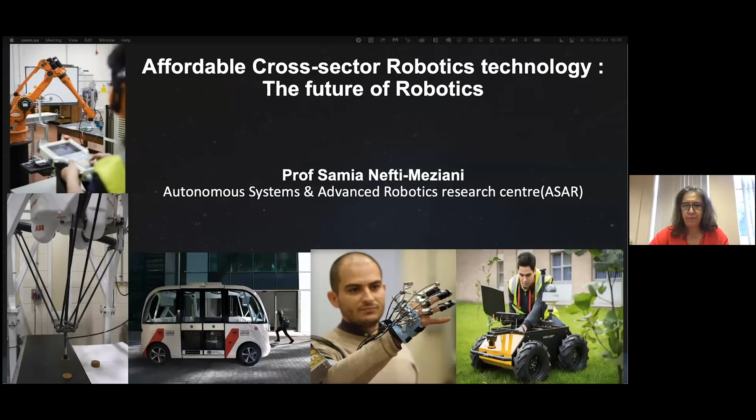Excellent, okay, thank you, I think I've got the slides sorted now. Good afternoon everyone, thank you for the invitation. It's a pleasure to be here to talk about affordable technology for cross-sector industry, and also how I see, from my perspective as an academic and entrepreneur, where robotics is really going in the future.

Before I start my presentation, I'm professor at Salford, and I'm also leading the development of the newly established North of England Robotics Innovation Centre, co-funded by the EU and UK Research England. The idea is to build cross-sector technologies in robotics—this is the first in the UK. I'm also co-director of the EPSRC hub in robotics and AI for future space technologies, and founder of the National Robotics Network, set up in 2013 alongside Salford and NDA.

I wanted to start by showing these slides because it's really important to see why I think the future will be cross-sectorial technology. As you can see from these four photographs, coming from different sectors—the focus of my center for the last 25 years has mainly been to design affordable smart system machines which can interact and collaborate safely with humans, at different levels of autonomy.

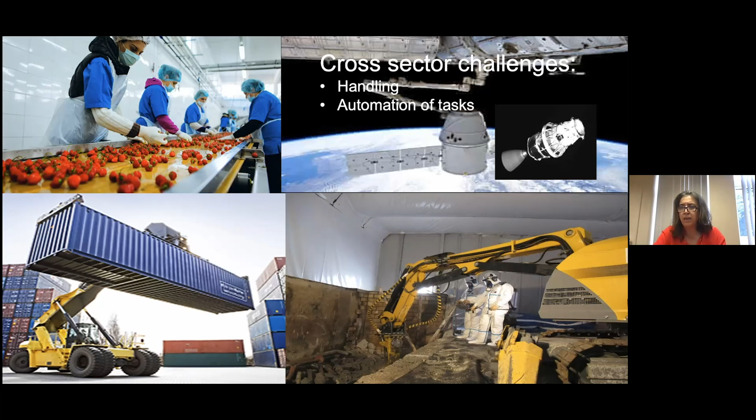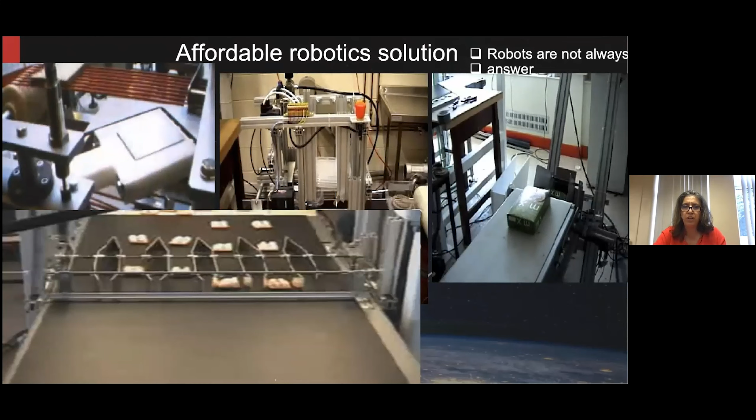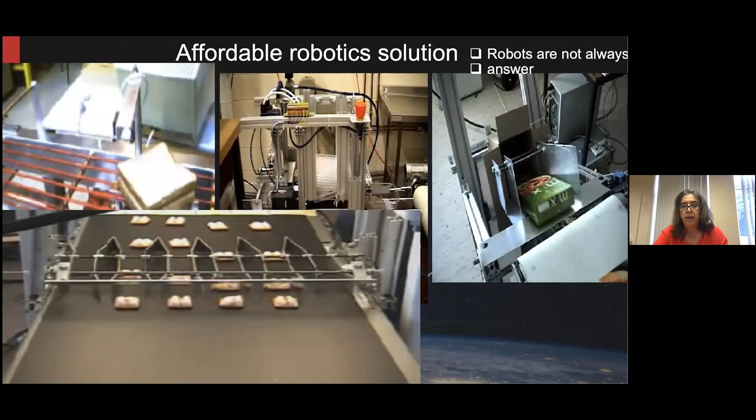Now, I'm just giving an example of the different automation system machinery that we have developed over the years. The reason I chose these examples is because it shows how simple they could be, but yet it's hard to think about the solution. The reason I'm doing that is most of the cost is usually the biggest problem.

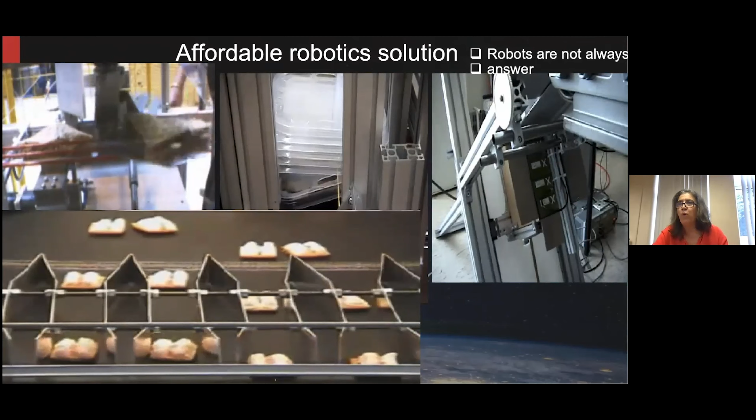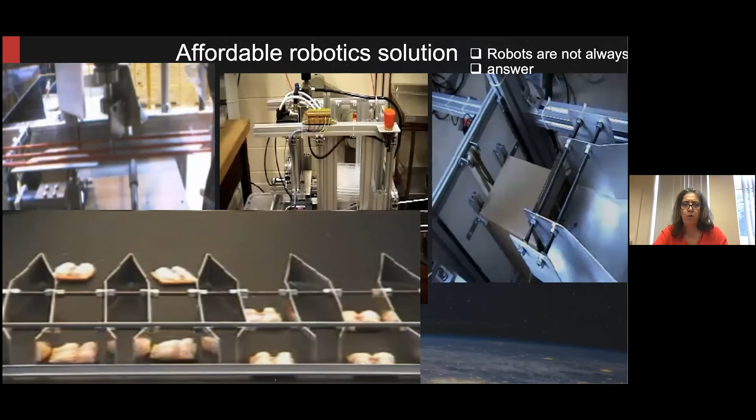And us as academics, we have to factor this as a key problem. It's good to design sophisticated technologies with very expensive tools, but it's very hard to design reliable technologies in a very low cost way. And I think that's really important.

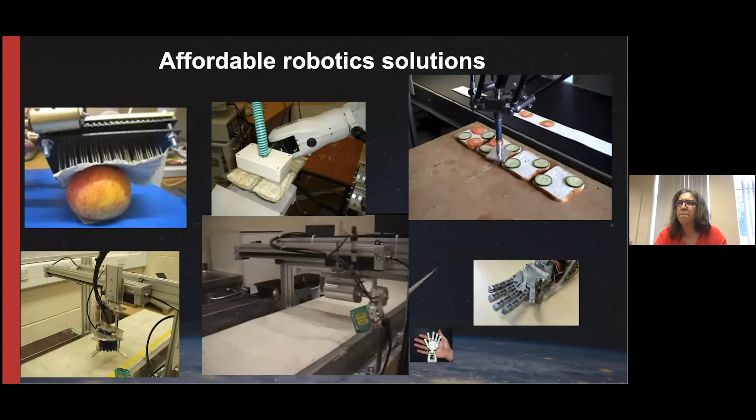Then you could see we have developed several machinery, and as far as handling systems, we have designed different end effectors. Another affordable automation solution we have developed is for food product, which can vary enormously, but you have to have dedicated grippers for different types of products. This is not the solution, or at least represents a very challenging problem for us as academics.

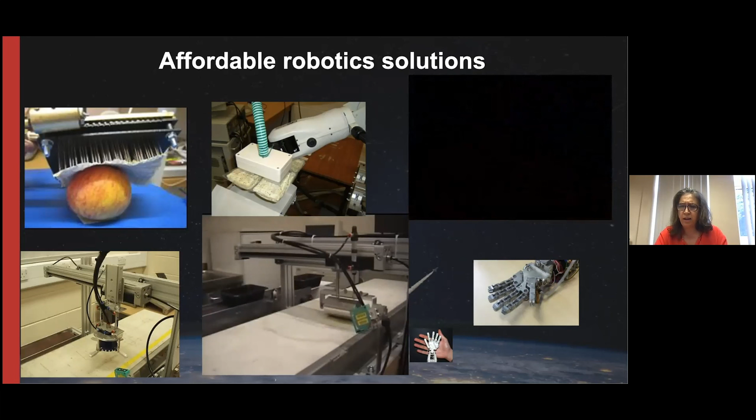Something my team has been really looking at for the last decade - I coordinated a big program, the first in manufacturing, involving the design of end effectors. There are special end effectors, there are cross-sectoral end effectors, and this is quite a complicated problem to address.

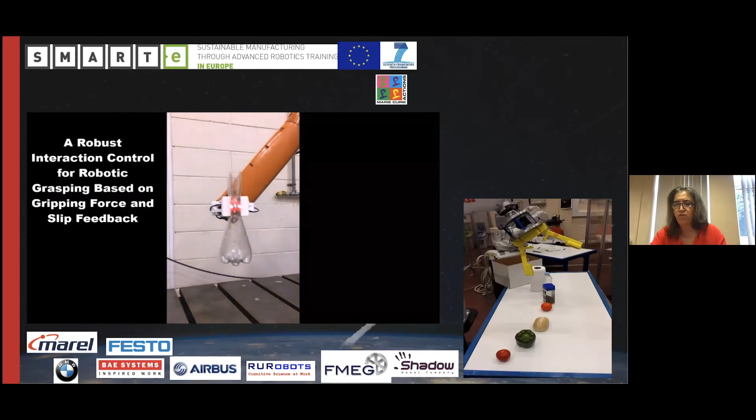I'm showing here a gripper which can be used without the need of a vision system. What it's all about, when you look at the company's art, is all about productivity. Ideally, we want to use the same gripper for every single task across different sectors without having to change it all the time, because that's not interested in terms of productivity. But we also have to think about the design, because cost is of paramount importance.

Having a gripper which can blindly grasp without letting an object slip, regardless of shape, form, or payload, is absolutely a winner for industry.

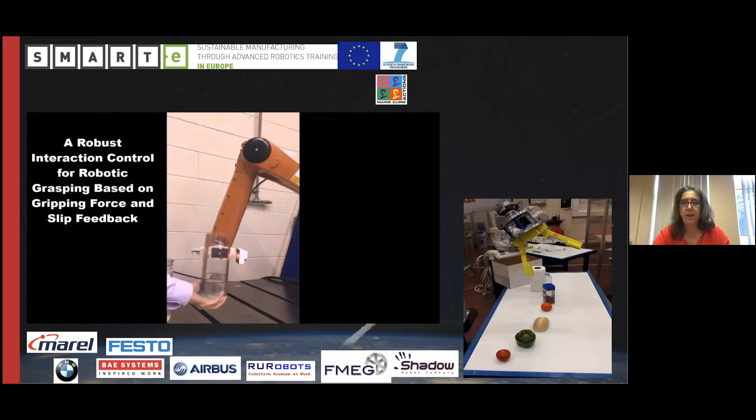This is one example, the first prototype. I'm pleased to say this prototype led to a 45 kilogram version of this gripper, which was part of the 8.5 million integrated innovation nuclear decommissioning competition led by Jacobs and funded by NDA, Innovate UK and BEIS.

This was part of the technology selected to pass to the third stage. I'm very pleased that this gripper, the same one you've seen earlier, will be tested at the Sellafield site by 2022.

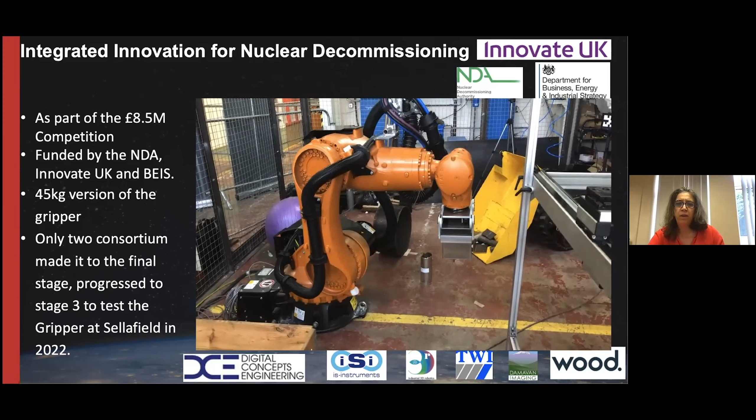You can see this gripper can handle all types of objects, including the ball you can see at the back, which was a key problem especially when placed in a nuclear site. It's important that you don't have to worry about changing the gripper for any object - that's exactly the technology they wanted to have.

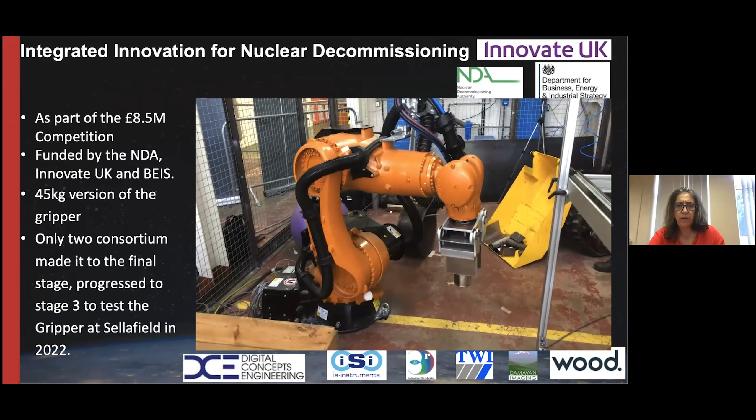I'll skip these, I'm afraid. The same version of the same gripper is being deployed now as part of a demonstration, showing a simulated test bed of a satellite equipped with a robotics arm, as you can see, in our FAIR-SPACE hub.

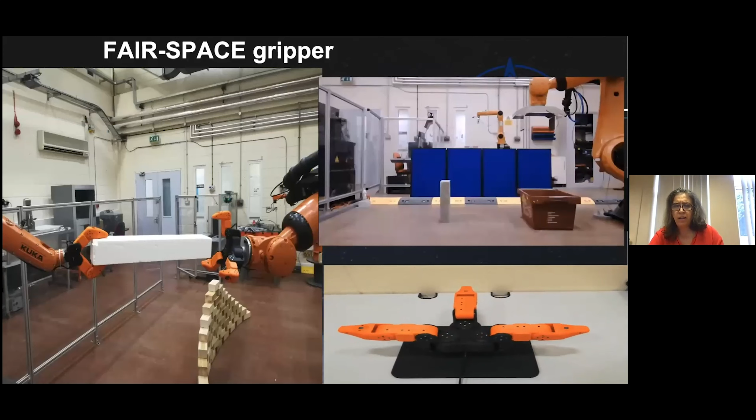This gripper technology can autonomously and surely grasp a nozzle of this AKM apogee to pull toward the satellite body without the need for an RGB camera. That's really important - you have a two-fingered and a three-fingered version.

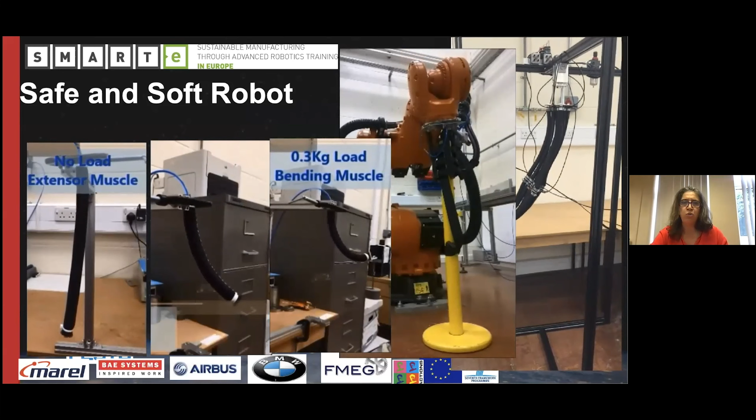Another important area - we talked about soft robotics earlier, it's a key area, and the problem is it faces a lot of challenges which need to be addressed. Why is it important? Because now we want to move from really hard rigid robotics systems to soft, safe systems ideally. But there are a lot of challenges that need to be addressed.

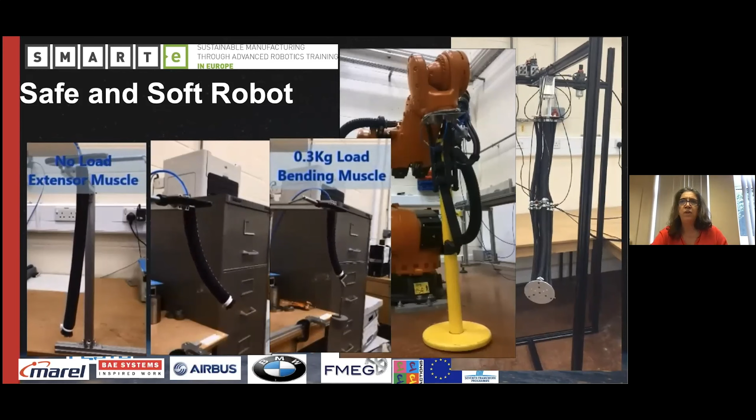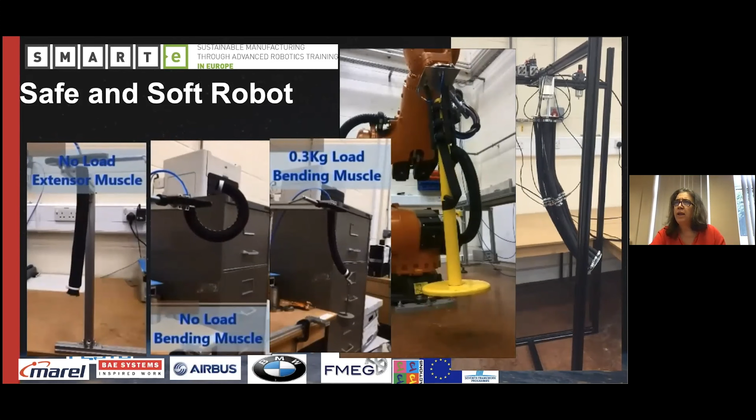I think we've been really active in designing systems at the component level - you need to sort out actuators before thinking about robots, and that's what we've been doing. As part of that, a different technology emerged, because we are in discussion about using soft robotics in manufacturing for maintenance and assembly. We have also started discussions to take this further with hospitals.

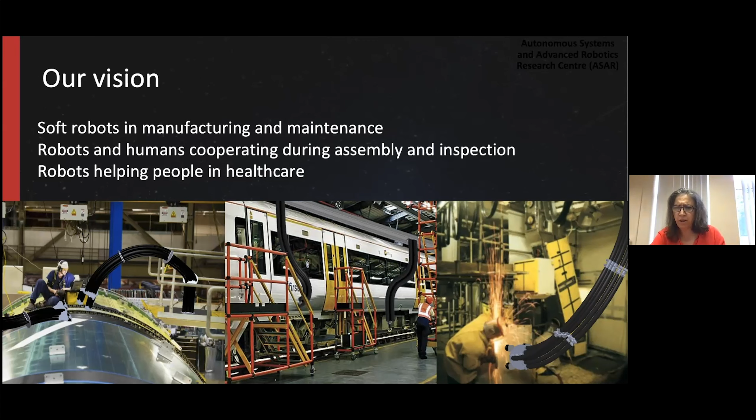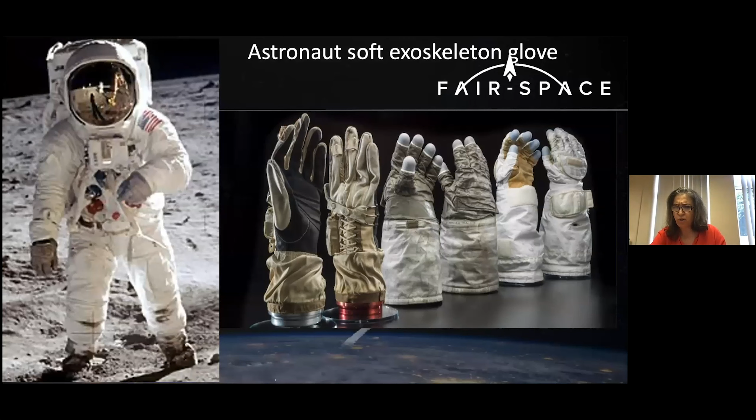Then we have another here, as you could see, the same technology which comes from soft robotics. We are deploying it for another application: soft actuator sensors for astronauts.

I would skip these because I'm cautious about the time. We have developed a prototype here for an astronaut glove. It's a wearable force augmentation glove using pneumatic muscles, which will assist grasping and manipulation of objects held by the astronaut's hand. The accuracy of these actuators will highly depend on the sensing technology we have developed.

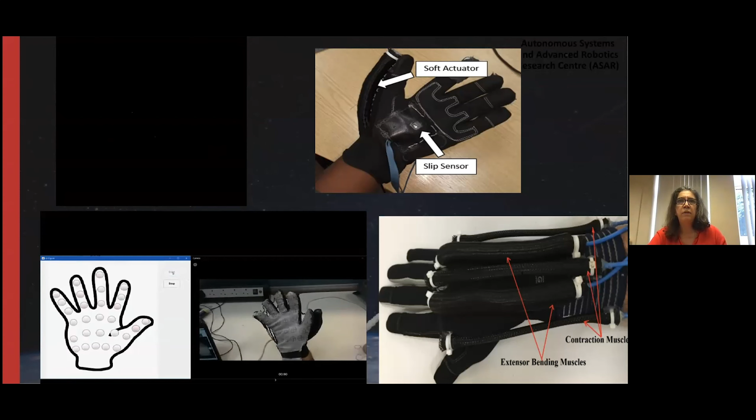A new type of sensing technology for this glove. I will skip the slide. Now, another technology, which is a cognitive platform for intelligent perception.

This was part of the Gamma program. This platform is endowed with high cognitive capability. It has been used in different sectors, particularly aerospace, and after in defense with MOD.

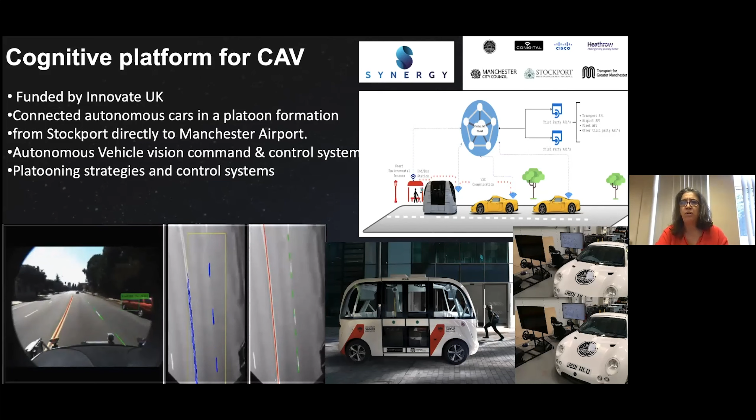Now what we have been using is part of Innovate UK. The same technology is deployed to build the CAV. My group is building the CAV, this cognitive platform, which connects the Westfield autonomous sports cars in platooning formation from Stockport to Manchester Airport. The trials will be in August. It's a real system now, being deployed in a real application.

Without losing sight of the digital twin, it's a very important part. You've heard about how important digital twin is with robotics, with cyber physical systems, that RGP has been working on — the framework they have developed. Why it's important: we used to call it simulation in the past, but it's more than that now. We are looking at a framework which reconciles the cyber physical world with a robotics platform.

I wanted to talk about how important cross-sector technology is. The NRN has been doing a lot of work on this, and I'm pleased to say they have issued the first roadmap in this area. We have been working on establishing the common need, establishing the technology baseline with end users, and also the technology development, and the key areas of technology we need to focus on.

One of the things I'd like to say is we have to think about cross-sector robotics. Traditionally we've focused on robustness, but I think we need to completely rethink the way we design robotic systems. We need to think about reconfigurability — how important it is to design a system that can continue functioning in the presence of internal and external challenges without fundamental change of the original system. Those are the key challenges we have to develop.

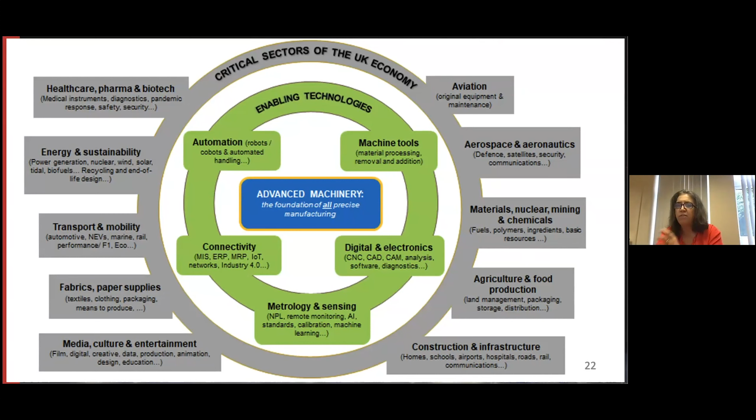I'm also pleased to let you know that the UK is investing in smart automation, smart machines, because it's absolutely vital for industry. We are part of this AMP initiative, which is about establishing and delivering capability and activity on behalf of the advanced machinery sector — and by machinery sector I mean the entire supply chain. When we think about robots, we shouldn't think only about the robot itself, but the different components, which is absolutely vital for the UK economy.

This follows on from that. We just heard last week that we won the AMP initiative, Strength in Places, with the University of Leeds partnering as well. AMP stands for Advanced Machinery Productivity, and we will be, for the first time, looking at how to really develop smart machines. This is extremely good news for the UK. Those are the partners and industries behind this initiative.

To finish off — and I'm sure Anna will talk more about this — I'd like to conclude by saying I'm very pleased to show that the direction of research my team has been taking for many years and decades, and the National Robotics Network, is now aligned with the RGP aspiration of building this cyber physical fabric: creating, and more importantly reconciling, the virtual world with the physical smart machine world.

These have to basically — we talk about the need of common interfaces, common standards, but also the digital glue, which is really important. You can't do that if we don't start really thinking from now how to build this next generation of common technology or cross-sector technology. Only by doing that could we have this coalition of end users who want to work together to build and invest in this technology. Thank you for your attention, and that concludes my talk. Thank you.

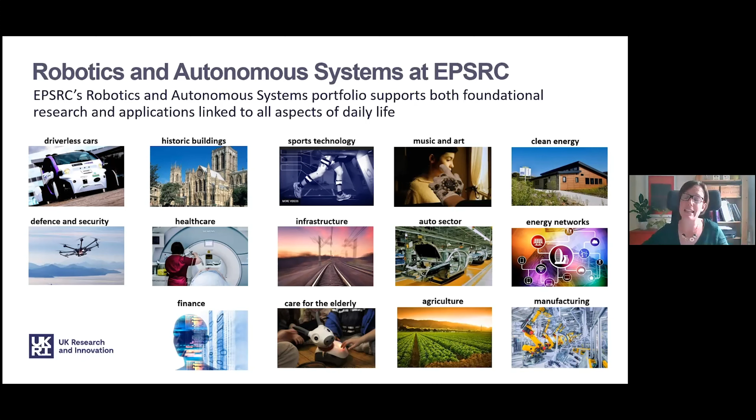Because in the end, a lot of people I talk to who aren't you people on the call today tend to assume — and I'm sure you come across this all the time — that the robots in films are real, that it's all done, you can buy it in a shop. But actually a lot of what I try to do, as I think you probably do too, is talk about the key foundational research we need in order to drive that vision forwards.

At the moment, the interesting thing to me is the richness and diversity of the portfolio we currently have in terms of robotics and autonomous systems. We support research activities through lots of our bottom-up routes. We have a rich and diverse responsive mode portfolio across the organisation, across EPSRC, that relates to robotics and autonomous systems — whether it's some of the application work Samia talked about, or some of the much more foundational computing or control systems work at the other end of the spectrum. The really interesting thing is we have that basic portfolio.

We also have, I think, a really strong portfolio of programme grants. Those are large critical mass investments. Many of you will know about these, or some of you on the call lead them, sitting across the UK and focusing on key topics. I think it's notable that there are so many of these big strategic investments, because that reflects how important and valuable the broader research community sees this area through peer review.

Also in our portfolio, I think the role of skills investments, the CDTs, which many of you are very aware of, are a key element of what's being driven forward in robotics and autonomous systems, both in terms of research and the broader workforce, which touches into the white paper that Rob talked about earlier.

The two investments I wanted to briefly touch on, other than the very important UK-RAS network - sorry for forgetting that plug - are the ISCF investment, which many of you know is 4 hubs in extreme environments, one of which Samia already talked about. The other is the Trustworthy Autonomous Systems Programme, a hub and nodes activity involving about 18 institutions and 100 project partners.

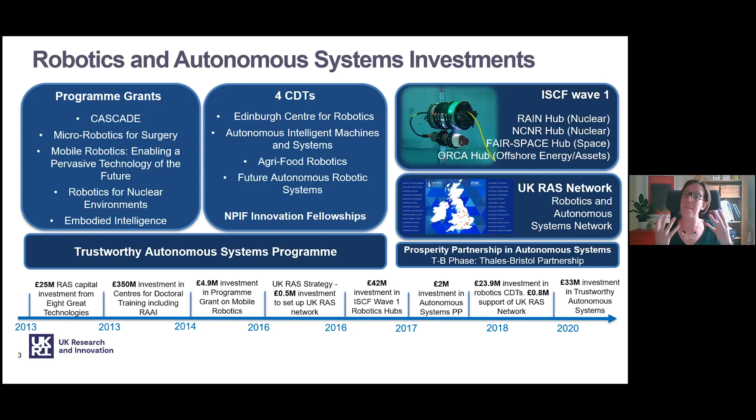So my role has changed over the decade I've worked at EPSRC, from thinking about these kinds of conversations and how we invest, to also having to write the really big grant proposal to get the money for you to write your grant proposals. There's something interesting about the fact that we've been quite successful in making those arguments, because that means others buy into the importance of this area.

So I think the aim of my team - apologies for the excessively animated slide at this point - is really thinking about that opportunity.

There's quite a high political profile of both robotics and autonomous systems and AI, and the continuum between those things. Don't get me wrong, it's a complex landscape and I could draw many Venn diagrams, but there is a high political profile of them.

The interesting thing my team tries to do - we were only set up a couple of years ago essentially to do this - is take that political profile and use it as an opportunity for the research innovation community. What I mean is really thinking about how we take that profile and advocate for the need for research and innovation investment, in order to deliver on the exciting promise that politician or industry colleagues might see in robotics and autonomous systems.

We really do that by trying to understand the landscape - you'll have met lots of my colleagues. We try to understand the gaps, the opportunities, the barriers, and what we might need to do to overcome those, working in partnership with you.

But we also spend a lot of time building and consolidating mutually beneficial relationships. I know that sounds like one of those slightly naff terms, but I think that's the core part of what we do - working with UK-RAS, with the RGP, with yourselves on this call, with lots of stakeholder groups, with government, to think about how we advocate for the importance of RAS, and how we really realise the opportunity of the high political profile by collaborating together.

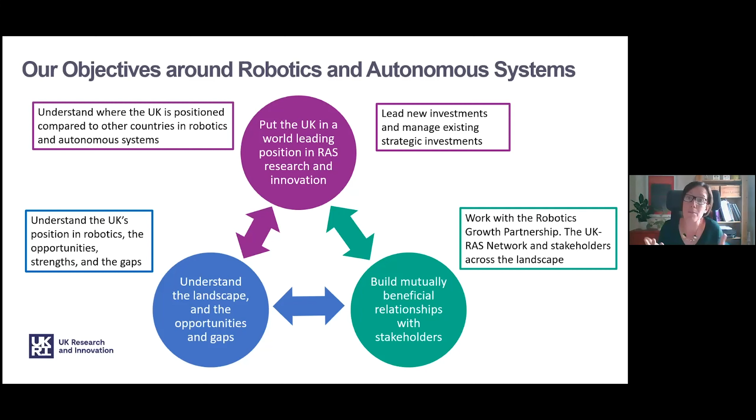So that's where the challenge bit starts to come in, rather than simply the 'where are we now' bit, which is my first couple of slides. Because in order to really maximise that political profile and turn it into an opportunity for all of us, that has a role for probably everybody on this call and lots of people that we all know.

So just to move on to a forward look - I'm going to say something which might make you all roll your eyes, I say lots of those kinds of things, I'm aware of this, don't worry - but I would really encourage you to have a look at some of the current government strategic pieces around research and innovation.

So firstly, the government's recently published innovation strategy brings out robotics and smart machines as one of its 7 key technology families. That says there are colleagues in government who've been influenced by the RGP, Samia and colleagues, and Rob and others, to really prioritise the importance of robotics and autonomous systems. There's also things like the integrated review, essentially a review of defence research and innovation across UK government, which brings a lot of really interesting questions about autonomy, control systems, decision-making systems, and the need to build sovereign capabilities in the UK.

And whilst you might think, well Anna, this isn't really relevant to my research, I think it is, because that is what the shape of this opportunity looks like. It's that profile that robotics and autonomous systems has at the moment in a political context that together, I think we could do something to really build upon.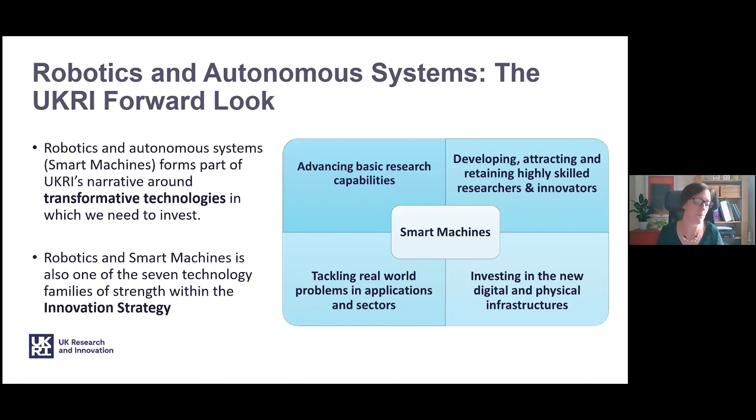So just to leave you with maybe a question - a rhetorical one - how can we work together? My team and I do a lot of work to advocate for the importance of this area, and lots of colleagues on this call do that advocacy piece too, but I'd really encourage you to think about how we do some of that together.

How can we continue to make the case for all the routes we can think of for the importance of RAS research, and the fact that we're really good at it in the UK, and that those robots in films aren't things you can buy in a shop. I know it sounds flippant, I apologise, but we need to remember that's where some people are as key stakeholders in this space.

And for me there are 2 parts to that. One is about that advocacy routes piece and what we can all do. The other is about evidence - how we evidence the benefit of investment, what's come out of things in the past. I know it can be annoying when we ask about comms stories - I'm not even going to mention REF, I know I just did, but there's a really important thing that comes from stories about impact: it tells a really compelling piece to people one needs to convince about investing in these areas over lots of other very important areas that equally exist in the landscape.

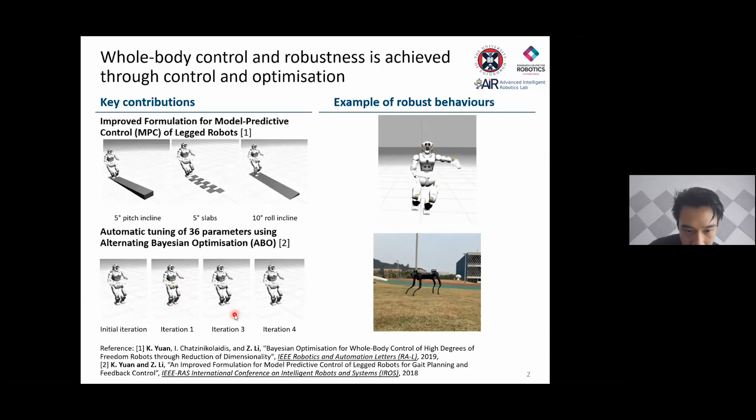So in the initial iteration, nothing is going on, and the robot falls over after one step. After one iteration, it's a bit better, but only after three you can see that it walks all the way to the end, though there's still some jittering. After four iterations it fully converges, and actually the parameter set is better than what I could tune by hand as a human.

Some of the robust behaviors you can also see include one-legged balance. This is, of course, in simulation, where we drop five-kilogram boxes on Valkyrie, and she's still able to balance.

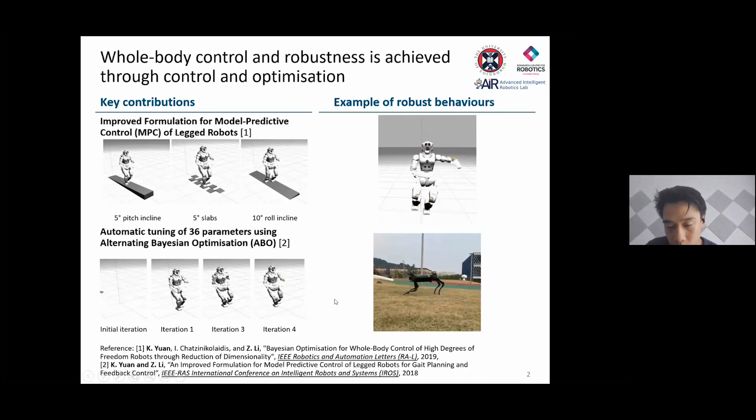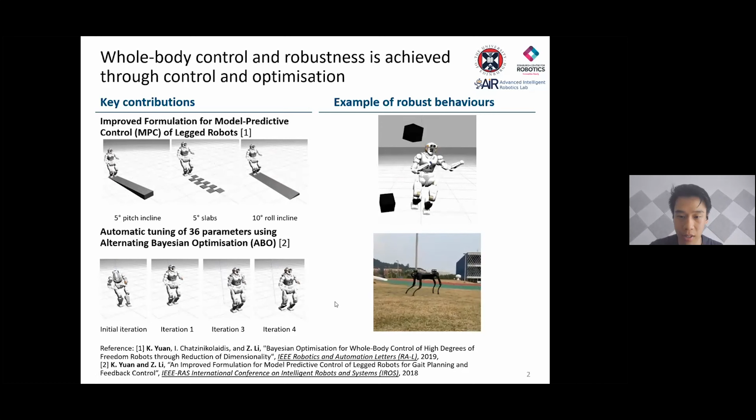What you can see here is basically Jueying, which is a quadruped robot, being pushed, and it recovers from a fall. Maybe that was a bit too quick, so I'll just play it again. The high-level control is provided by deep reinforcement learning, but the low-level control is done with very classical control.

Talking about deep reinforcement learning, which is the major part of my PhD, with its advent a whole new door opened: we can get intelligent motions by only specifying a high-level reward. The idea is that we tell the robot what to do, in this case walk forward with a certain velocity, and then just let the robot interact with the environment and learn how to actually achieve that reward.

So you can see here quadruped locomotion, quadruped fall recovery, which is from a fallen position just standing up. Here you can see how dual arm cooperation is done. With the left arm we are generating clearance, and with the right arm, once there's enough clearance, we are going to grasp it.

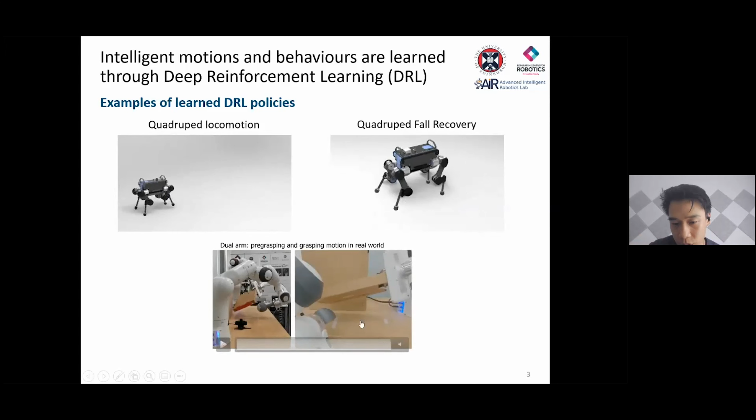What you can do with deep reinforcement learning is, of course, train a policy and then directly put it on the robot, as you've seen in the previous slide. But an alternative way, which we've proposed, is that you can also reverse engineer this AI policy into a controller that does exactly the same thing as the AI policy, but with the transparency and stability guarantees that you have from classical controllers.

We've demonstrated one way of doing so: we trained a deep reinforcement learning algorithm to make a humanoid recover from pushes. Valkyrie is pushed from the back or front, and she learns to balance basically the same way we humans would. For example, the step strategy - if I pushed you very hard from the back, you would take a step to counteract that disturbance.

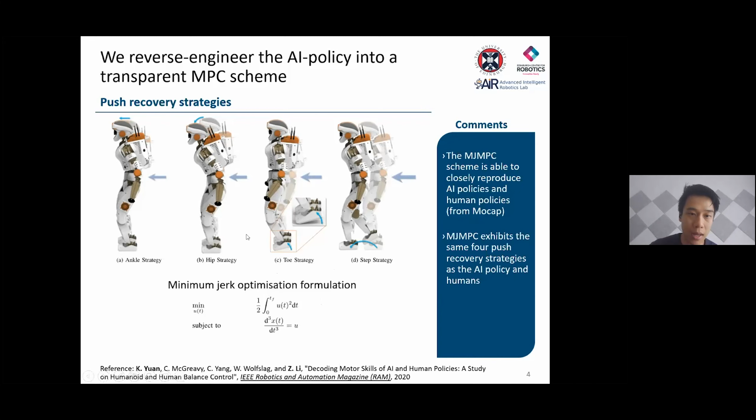It turns out that the deep reinforcement learning agent is learning a minimum jerk optimization formulation. So we formulate this as a minimum jerk problem and put it into a model predictive control scheme. In this paper we showed that this is exactly what both the AI policy and, surprisingly, also humans do.

We found this a very cool new way to use deep reinforcement learning policies and bypass the stability concern. Another thing you can do with reinforcement learning is combine multiple experts - what we call the multi-expert learning architecture. The idea is to use multiple experts whenever appropriate to generate new adaptive behaviors and achieve versatile skills.

What you can see here is that Jueying, this quadruped, has two experts: fall recovery and trotting. Using our multi-expert learning architecture, the robot learns new skills. You can see the skills smoothly transitioning, and after standing up it's able to walk and follow a certain steer command.

For example, here you see it being pushed. It concentrates on standing up, and once it stands up, it immediately switches to the locomotion mode.

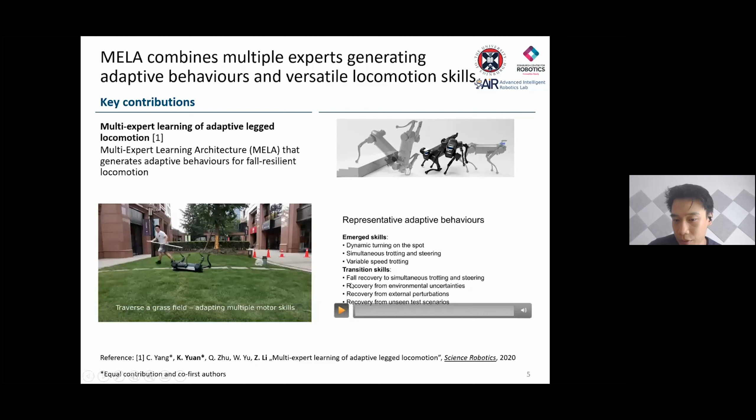Just to give you an idea of what motions you can learn from just fall recovery and locomotion - you can learn to follow this ball here, with dynamic steering left and right. You can learn simultaneously to steer and trot, as you see here, basically following this green ball in a zigzag pattern. You can, of course, also modulate the velocities.

Most importantly, what our algorithm is able to do is work with unseen environments. Here, for example, it has never seen how to behave when it falls off a cliff, but as you may have just seen, it falls off the cliff and immediately it's able to stand up again and continue its mission.

And then just lastly, some ongoing work that I'm doing right now: I would like to see how humans are actually doing motor control and try to adapt that to robotics to generate fully autonomous behaviors. This is done by mimicking how human motor control works, drawing on 60 years of neuroscience research. There are many principles discovered over that time, and we're applying those principles to robotics. The algorithm we came up with, following these principles, is able to pick up a box, deliver it at a table, approach a door, manipulate it so the door opens with this button, and finally reach the goal.

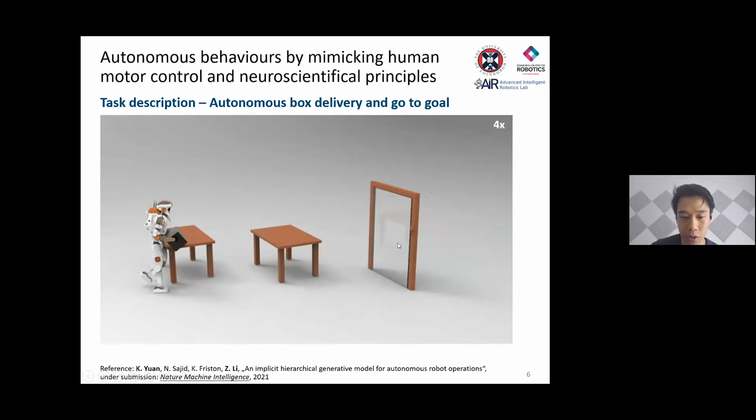With that, I would like to thank you for your attention. If you have any questions, please feel free to email me or my supervisor at this email address.

Thank you very much, fantastic, amazing, really amazing work. Please do type in questions in the Q&A, or drop an email afterwards. I think it's really exciting to see the actual way it's evolving and dynamicing, and the job of the person with the stick pushing the robot over looks like great fun. There must be some kind of sport in terms of pushing robots over. That's great, fantastic, thanks for that.

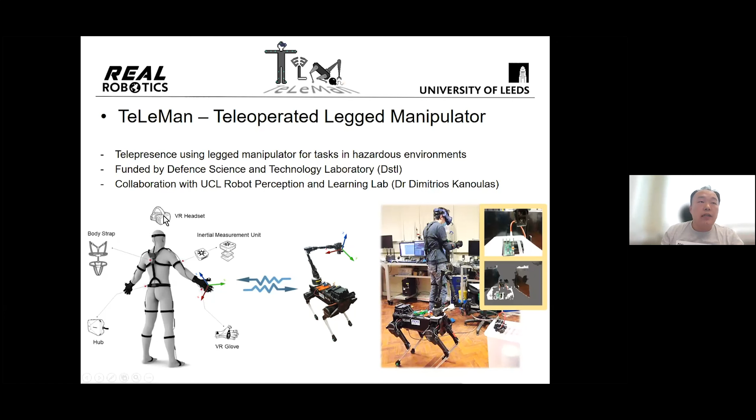In this video, you can see the human operator is remotely operating the legged manipulator for a bomb disposal demo. He controls the robot to move close to the bomb, which he needs to open a box to access. After unplugging the bomb, he manages to walk the TeLeMan robot away.

There are still minor issues such as bodysuit feedback drifting, communication delays, etc. But the whole system shows great potential to relieve humans from dangerous tasks.

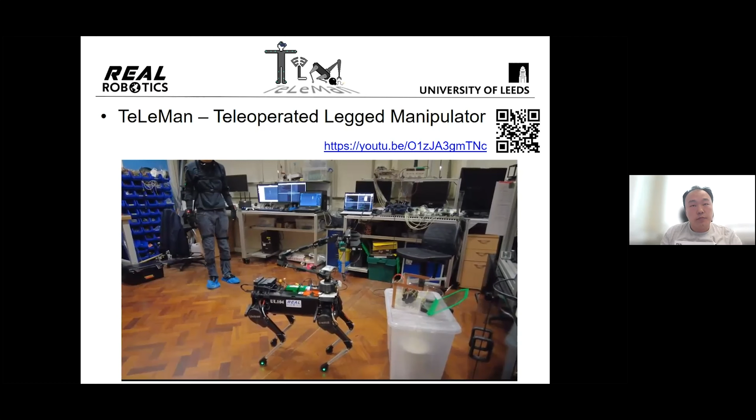For my future work, I will devote myself to improving motion intelligence for legged robots. For instance, we can combine advantages of different locomotion styles to achieve best performance on complex terrain. The quadruped robot needs manipulators to open wider possibilities. However, their whole body motions need to be wisely coordinated.

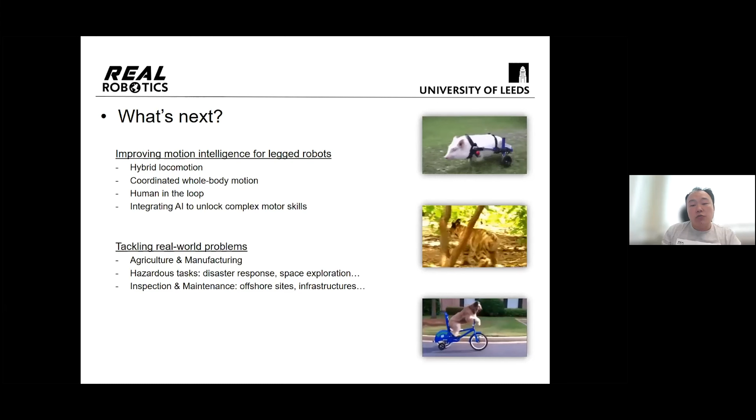We also need humans in the loop for some hazardous tasks where mature immersive assistance technologies are needed. Also, rapidly evolving AI is becoming more and more important to improve legged robots' perception and decision capabilities to realize more complex legged motor skills.

All in all, I'm expecting to see more and more legged robots coming into our lives to solve real-world challenges in different sectors.

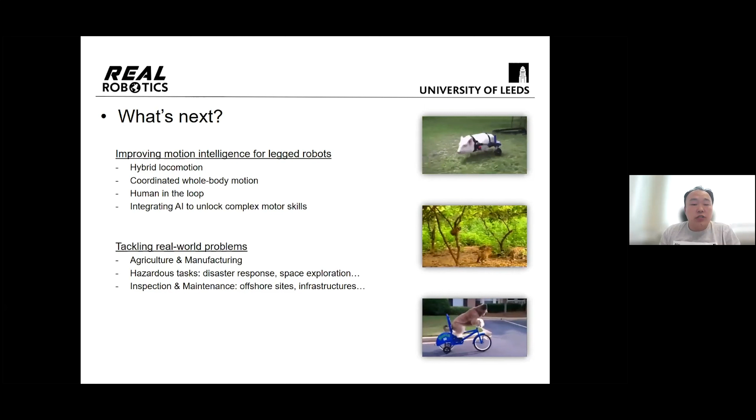Last but not least, I would like to take this opportunity to thank my team, collaborators, and funders for their invaluable support in the past years. Thank you very much.

Fantastic, thank you. Yeah, amazing talk, and again, congratulations. Great piece of work there, really good. Let's go on to the next award then.

So the next award was all about impact. We really need to make sure that we do robotics for real world impact, so we're looking for great applicants for this award. But I'm very pleased to announce the winner was the COBRA consortium, led by many people. Today to talk about it is Dr. James Kell. So across to you, thank you.

Hi there, Rob. Thank you. Good afternoon, everybody. Yes, my name's James Kell. I'm representing Rolls-Royce today, but really I'm representing the whole of the COBRA team. Hopefully you'll be able to see my slide. I can't see anybody from Zoom at the moment, so I'm just going to plow on regardless. If somebody shouts in my ear, that means that everything's gone bad.

It's an honour for me to speak on behalf of the team you see in front of you, to describe some of the things we've been doing with the COBRA project. I think one of the reasons this caught the eyes of the judges is that we're really looking for this to be a cross-sectorial type project, along the same lines as Samia was just describing, in terms of designing something that can work for a couple of different particular user scenarios, but also getting the building blocks of that to be applied in a range of different areas too.

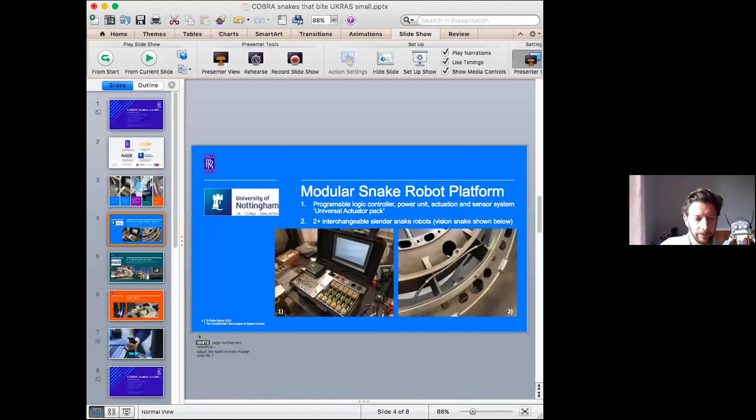Yeah, sorry James, can you hear? We can't see a picture. Sorry, we haven't got - you can't see anything. Okay, that's a shame, no I can't see. I can see you, which is great, but I can't see a picture. Right, how about that? That's better. That's good. So you can see me.

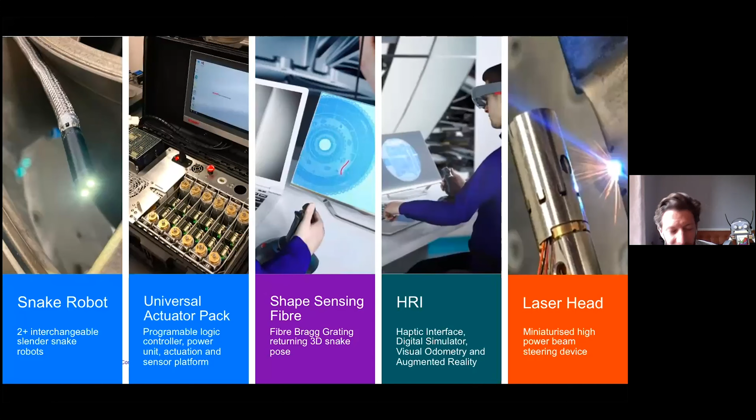All right, so there's some blue. So we've described all that stuff. We're going to go on to the main parts. Thank you for intervening, Rob - I could have been going on for a long time there.

But yeah, so this is the main building blocks of the project really. The snake robot part, of which we've built within the project two, and actually outside of the project we've built more than that. So the actual snake part is this bit here - you see it going into a bit of a jet engine, so that we can perform some form of task and inspection scenario. The bit that is connected to and provides a way of controlling and pulling all those tendons is the thing on the left hand side that we call the universal actuator pack.

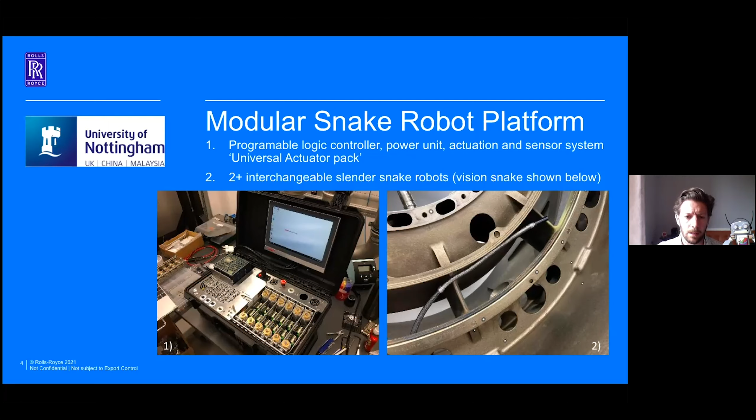That's the big, expensive and highly capable part, but we only need one of those. And the relatively low cost part, which is doing it a bit of a disservice probably, is the snake part, which we can interchange. We've got a couple of these things, and one of them has been used in a medical application, which I'm hoping the University of Nottingham will start to describe in more detail in the coming weeks and months. So from a human-robot interface perspective, RACE did a lot of that work.

One of the cool things about this was that we did some work in a remote control scenario. The guys in RACE, Andika and Stephen, devised a way of us being able to control the system from a remote location, which was pretty cool. That's the thing you see in the first image on the left hand side - that's Andika controlling the snake while he's in Culham, Oxfordshire, and we're all sat in the university labs in Nottingham watching the snake be driven around a little test scenario.

And it's really difficult to make out without proper big videos, but one of the things I think is really cool about the work that RACE have done is the bit on the right hand side, number 2, which is to do with a digital twin or a simulator, but also kind of embodying a visual odometry.

So this is a way of us being able to simulate where we think the snake is inside the engine, which I think, if you can imagine trying to poke a wobbly stick inside a jet engine, you're not really going to know where it is unless you know an awful lot about the architecture. So this is something that is really helping us de-skill that type of operation.

And of course, it's not necessarily just applicable to robots. You could also apply it to a range of other things too.

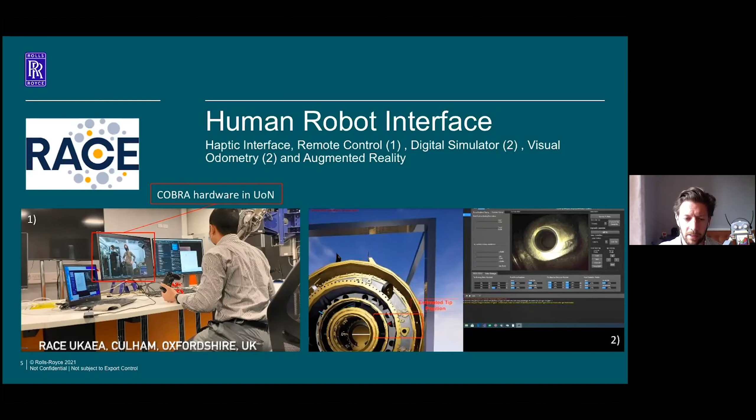Of course, when we get to the area of interest that we've inspected previously, we're not just interested in looking at something, we're really keen to perform some form of useful task. So that's why we brought OpTek into this consortium, and they've devised a way of miniaturizing the beam steering hardware so that we can machine metal components, but with this tiny device that is only about 8.5 millimeters across in diameter. The amount of power going through there is relatively big, and it's able to machine metallic parts for things like removing damage or getting rid of corrosion. But we can also pass it through a 10 millimeter hole and perform some form of invasive surgery on a jet engine with it. So it's all pretty cool.

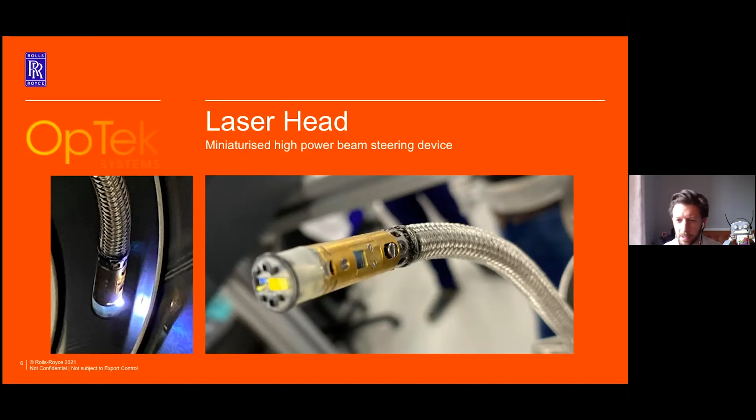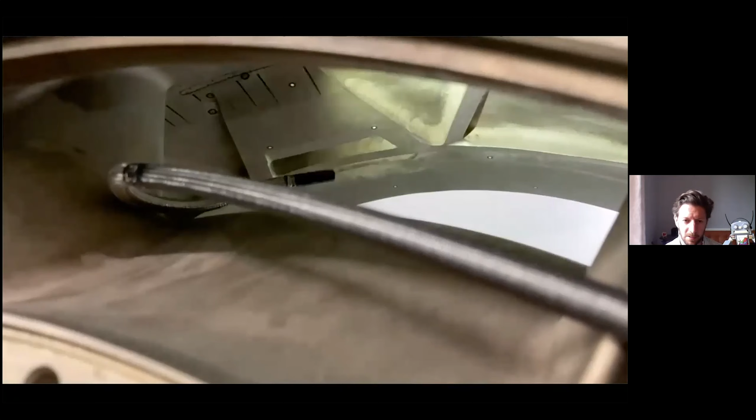If you build all that together, this is a very quick, brief video, but you see the snake making its way up to the top of a jet engine and performing some form of inspection. That's just a cross section of it working in a lab. There's the laser doing its milling, and just a brief glimpse into the fact that we have done it on a real engine a couple of times, but we're in the middle of cutting together a really big, good video that shows all of that capability I've just touched on.

But it just befalls to me to thank everybody on behalf of the rest of the consortium, the rest of the people involved. You see those guys listed there: David Dragos, Richard from Rolls-Royce, not mentioned before, but he's somebody that works from our side in the nuclear business. Mike O'Key in OpTek, Stephen and Andika in RACE. We've all had a great time doing this work, and I'm sure they would agree with me that we're quite happy to share this on various different platforms. So please do get in touch. Thanks very much. Thank you.

So congratulations again. I know personally how hard it is to get dexterity manipulation in such a very small, slender robot arm. So yeah, a very big achievement, and not to be underestimated how difficult that is. So yeah, well done again.

Fantastic. Let's go across to the last award then. So the last award was really looking at those who have contributed to the UK-RAS or UK community in robotics and helping make things better. And I'm very delighted to announce the winner of this is Gianmarco Pisanelli from the University of Sheffield.

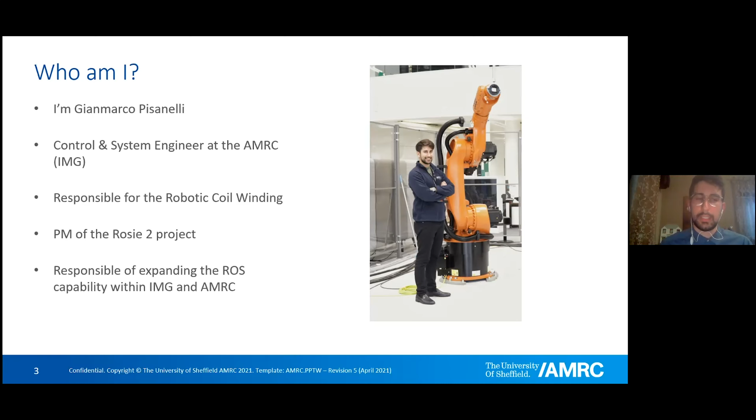So who am I? I'm Gianmarco Pisanelli. I'm a control and systems engineer at the AMRC, at the Advanced Manufacturing Research Center, specifically the IMG, the Integrated Manufacturing Group, which is owned by the University of Sheffield. I'm responsible for the robotic coil winding cell, which is a picture you can see on the right. I'm also the project manager of the Rosie 2 project, which I'm going to discuss in a second. And I'm also responsible for expanding the ROS capability within the IMG and AMRC.

So the Manufacturing Robotic Challenge, this was an event that we ran at the Factory 2050 in Sheffield. It was part of the Robotics Summer Showcase 2021. This event was jointly hosted by the AMRC and the CSI:Cobot project.

As I said, it was held virtually at Factory 2050, and we had 37 participants across 11 countries. The event ran last week from Monday to Wednesday, and we provided one-day training on ROS and safety and security in robotics, specifically collaborative robotics.

We then asked the participants to take part in 2 challenges. You can see what the challenges involved in the GIFs and pictures on the right. The first challenge was based on the Rosie 2 project, and involved an iiwa robot, a collaborative robot with 7 degrees of freedom, mounted onto a welding table.

The Rosie 2 project is basically a simulated environment of the real physical system, but it's also a digital twin. So we decided to ask the participants to first tackle the challenge virtually. Because the event was held virtually, they couldn't be physically at the AMRC, so we asked them to upload the code to the real robot, given the functionality of the Rosie 2 project, which is a digital twin environment that allows you to control the simulation and the real robot in exactly the same way. The task involved automatic surface sterilization for COVID-19.

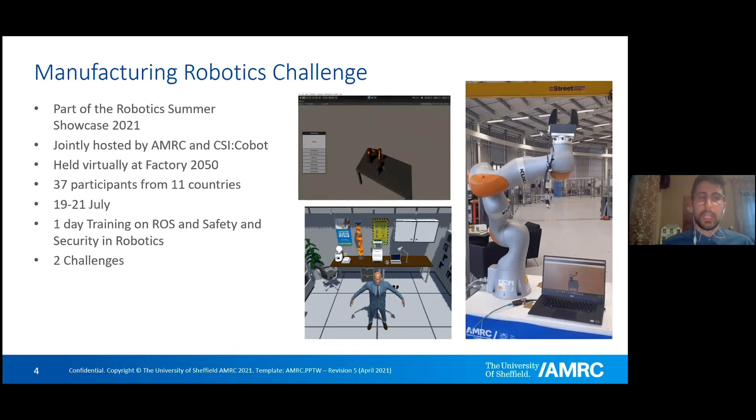The idea of the task was to have the human and the robot collaborating together to prepare these tasks. In the environment, participants had access to 3 or 4 different types of sensors, and they had to create an assurance case explaining which sensor they decided to use for the robot to complete the task, in order to ensure the safety of the human. That's pretty much the second challenge as well.

So why did we decide to shape the challenge around COVID-19? First of all, this challenge was meant to happen in 2020. Obviously, because of the pandemic, this didn't happen. Subsequently, we decided to hold the event virtually due to COVID-19. So we decided, why not turn our weakness into a strength? And then we decided to shape the event around COVID-19.

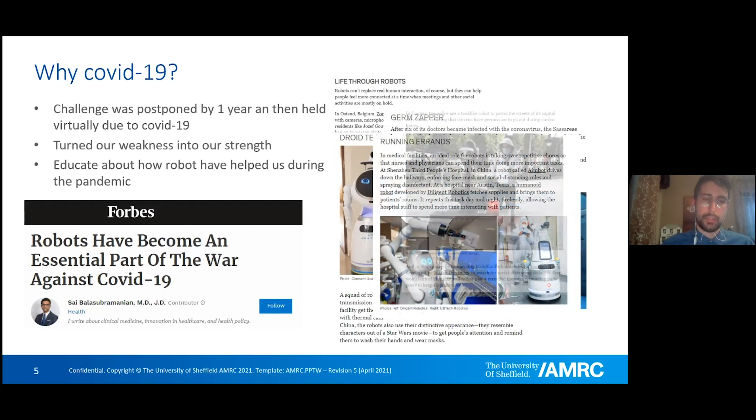Mostly for 2 reasons: one, to indicate how robots have helped us during the pandemic, but also to show the novel way of working that the pandemic has shown us, which is this hybrid way of working, when some people can work from the office and some people can work from home. I'm sharing here a couple of articles from Forbes and IEEE Explore, where there are a lot of examples of how robots have become an essential part of the war against COVID-19.

So as I said, the first challenge was based on the ROSI project, specifically the Rosie 2 project. Why ROSI 2? There was a ROSI 1 project initially, which we ran. The primary objective of the ROSI project was to demonstrate the use of ROS in a vision-guided pick and place operation, to illustrate the potential for the platform. Usually ROS is used in research and universities, but it's not very welcomed in industry. So what we're trying to do is move ROS projects from lower TRLs to a bit higher TRL, so that we can help industry commercialize more products that are based on ROS.

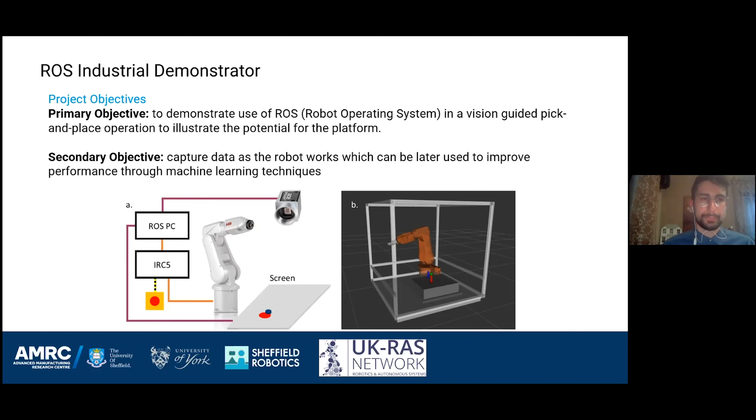There was also a secondary objective on the ROSIE demonstrator, which was to collect and capture data to improve the performance of the robot through machine learning techniques, specifically reinforcement learning.

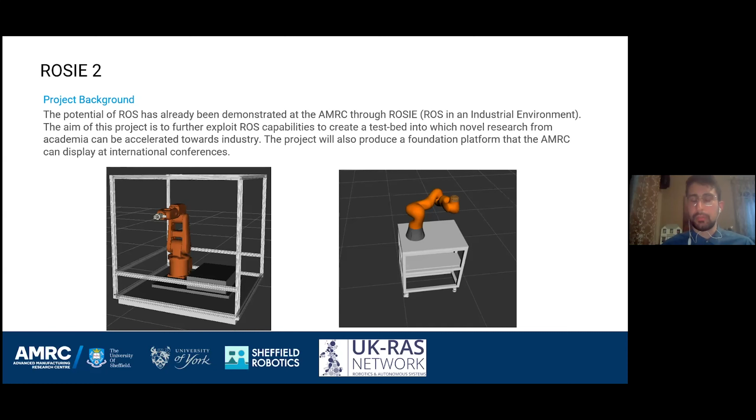The ROSIE 2 project instead moved the same sort of platform that we created for the ROSIE 1 project from an industrial robot to a collaborative robot. This was because we wanted to remove the fences and have better human-robot interaction. We wanted to prove that ROS is safe to use if controlled properly, and that it can be adapted to collaborative robotics.

These are briefly the objectives of the ROSIE 2 project. We wanted to build a ROS foundation framework for future technology coming from university to be implemented onto collaborative robots. We wanted to create a ROS demonstrator for the AMRC shop floor and Sheffield Robotics. We also wanted to create a KUKA digital twin that could be integrated with Unity virtual environment, and then expand this environment with augmented reality using the HoloLens 2.

We also added a natural speech interface, which allowed us to control the robot not only via augmented reality but also by speech.

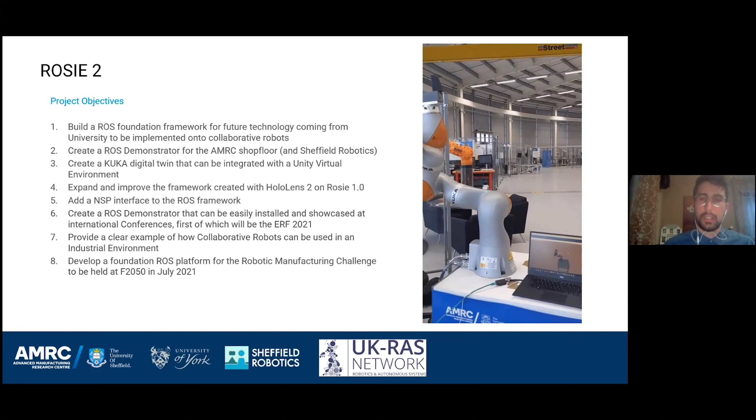And we created a demonstrator that we wanted to show at international conferences, the first of which was meant to be ERF 2021, but that was postponed again due to COVID. We also wanted to provide a clear example of how collaborative robotics can be used in an industrial environment. And finally, and most importantly, we wanted to create a foundation platform for the robotic manufacturing challenge that we held last week in Factory 2050.

And then, have I got still time? I can see you, Robert. I'm sorry, I think we're almost out of time, so very, very briefly, it would be great.

Okay, so ROSI 2 is basically a further expansion of the ROSI project, and we want to better enable the plug and play capabilities so that any robot can be just adapted, so we can adapt the ROSI 2 functionality to any robot in Factory 2050.

And then finally, the CSI Cobot is a project run by University of Sheffield, Sheffield Robotics, University of York, and the Assuring Autonomy International Program. As I mentioned briefly before, it's about creating safety in a virtual environment and then having a digital twin to improve the safety of robots.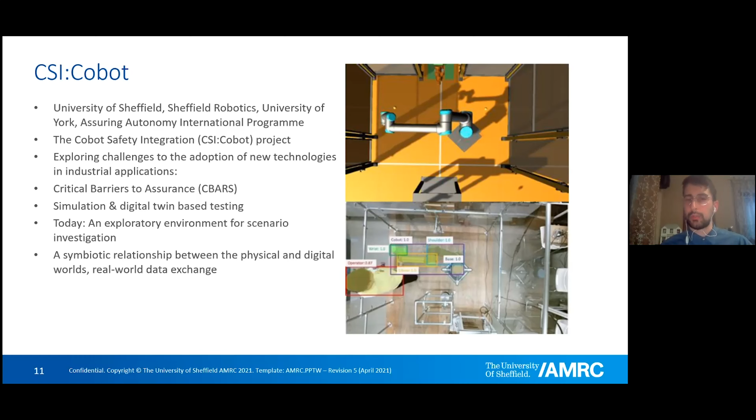And then finally, I would like to thank the other organizers of the UK-RAS Manufacturing Robotic Challenge that made it possible, and the UK-RAS Network for choosing me for this award. And finally, Steve Bowles, Tom Hudson, Lloyd Tinkler, and Chris Craggs, who had a secret meeting to nominate me for this award without me knowing. So yeah, special thanks to them. And yeah, that's it for me.

Fantastic, really great, and congratulations again. So congratulations to all of the winners and all who've done things. So yeah, wow, what a few months of UK robotics. I think we've shown today there's so much going on, so much amazing stuff, and I feel totally inspired by it. So again, congratulations to everyone for their hard work, I think it's been a team effort across things.

In particular, I wanted to thank those who helped organise the events, or at least led some of the organisation of the main events. So thanks to Marianne Knight, who's part of UK-RAS, but in particular congratulations to Dr. Claire Asher, who's tirelessly pushed forward loads of these things. I'm sure many of you who've been involved in events have been in contact with her, and being able to bring all these things together into a coherent form, ensuring they run smoothly, has been an unbelievable, amazing achievement. By far the biggest UK-RAS summer event we've ever had, and I think it's gone amazingly smooth.